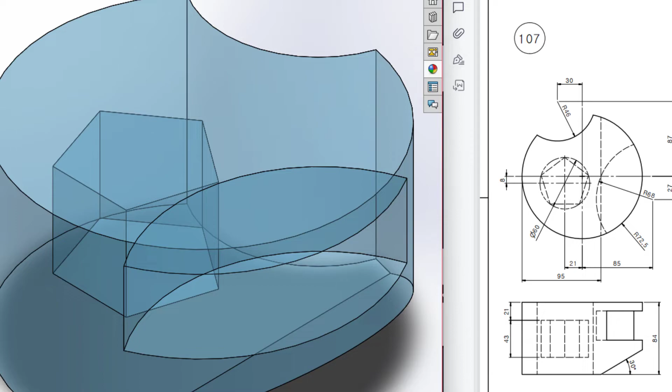Today we are going to solve this 3D problem. In this 3D problem, this is the isometric view, this is the top view, this is the front view, and this is the right side view.

First of all, I will start drawing from the top view. In the top view, I will draw the outer circle, and this circle has a radius of 72.5. After that, I will extrude boss it to 84. But I will extrude boss in direction 1 to 21, and in direction 2 to 84 minus 21, because here we have another inside extrude cut of this pentagon shape.

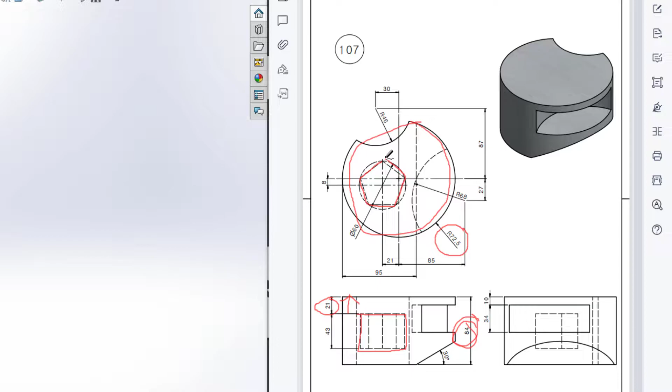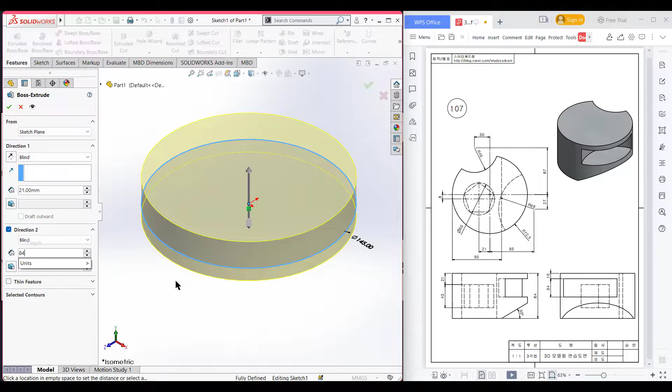Okay, so I am selecting the top plane. Now select sketch, then select circle and draw a circle of 72.5 radius. Now isometric it for a better view. Now go to features and then extrude boss, and extrude boss it to 21 unit in direction 1, and in direction 2, 84 minus 21. Now press OK. As you can see, we have extrude boss in direction 1, 21, and direction 2, 84 minus 21.

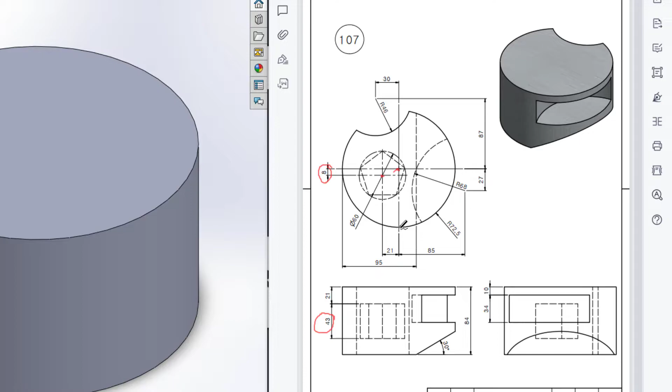So this line is our top face. From the top face I will draw a polygon, and this polygon has 5 sides, so it is a pentagon, and this pentagon has an outer circumscribed circle of 60 diameter. So I am selecting the top plane, then drawing this pentagon, and then extrude cut to 43 unit. But this pentagon has a vertical distance from the origin of 8 unit, and a horizontal distance of 21 unit.

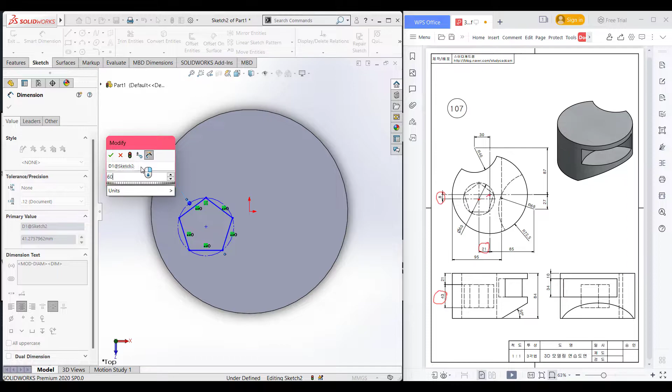So selecting the top plane, now sketch, now normal to it, now select polygon and select 5 sides. Now select circumscribed circle. Now draw your pentagon. After drawing your pentagon, select smart dimension and dimension the circle to 60 diameter. Now press OK. After that, it has a horizontal dimension of 21 unit. Then dimension it, it has a vertical dimension of 8 unit. Now press OK. Now isometric it.

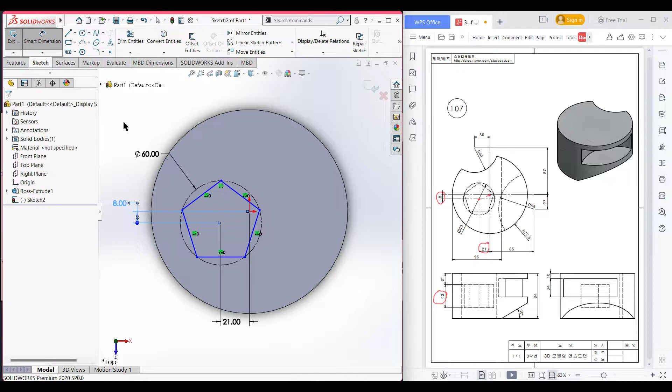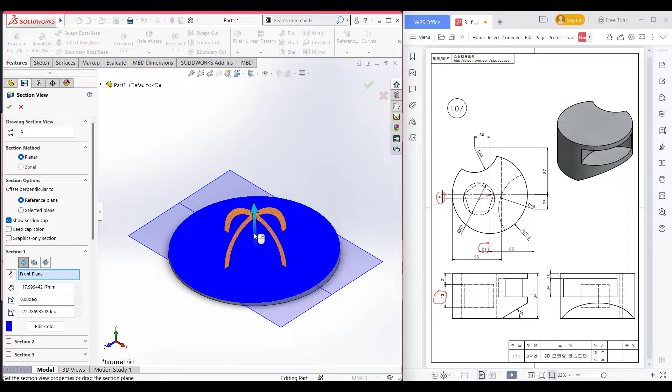Now go to features and then extrude cut. Extrude cut it to 43 unit. Now press OK. For a better view of your extrude cut, go to section view. Now move the arrow so you can view properly. So you can see in the inside of our solid face we have cut and extrude cut.

After that, we can see that we have another extrude cut in the right face. This one, in the 3D model, we can see this one. So first of all, I will draw a circle, and this circle has a radius of 68, and from this origin point it has a vertical distance of 27 and a horizontal distance of 85.

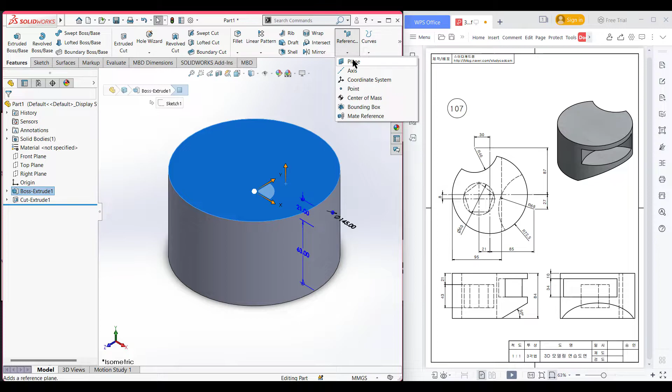But here we can see this extrude cut starts from this line, so I will draw a reference plane from the top face which is 10 unit under this top face. Then from that reference plane I will draw this circle of 68 radius. Selecting the top face, now select plane. Now as we have the dimension of 10 unit, use the flip option. Now press OK. Now select this plane. Now sketch, now normal to it.

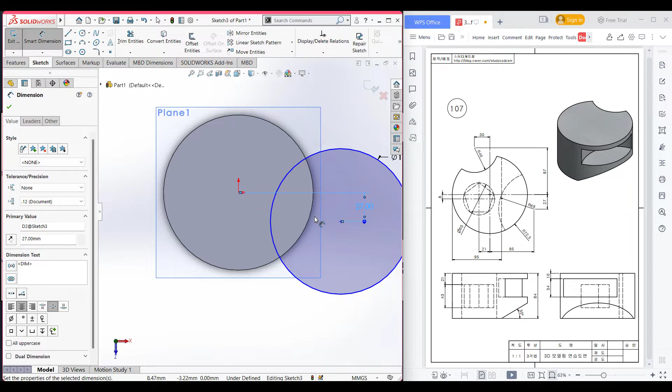Now select circle and draw a circle of 68 radius. Now select smart dimension and dimension it vertically 27 unit. Now again dimension this from the origin horizontally 85 unit. Now isometric it for a better view. Here you can see it has an extrude cut of 34 unit. So I will go to features and then extrude cut it to 34 unit. Now press OK.

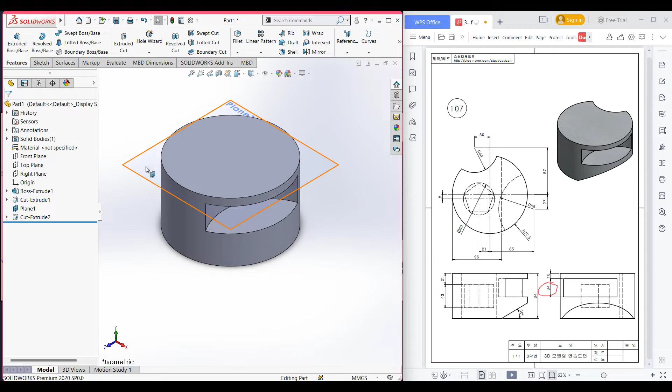Now I will hide this plane because I don't need it. Now here you can see we have another extrude cut through all here, and this circle has a radius of 46, and it has a horizontal distance of 30 unit and a vertical distance of 87.

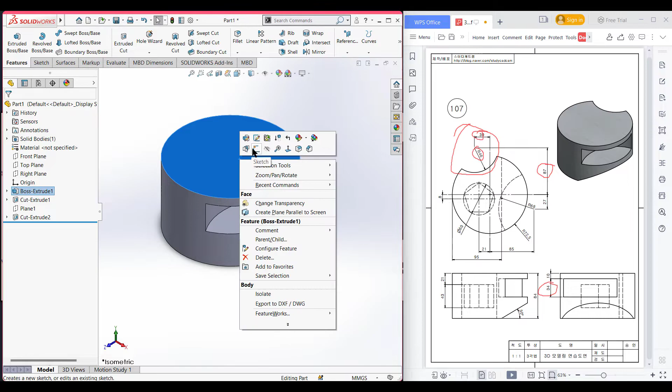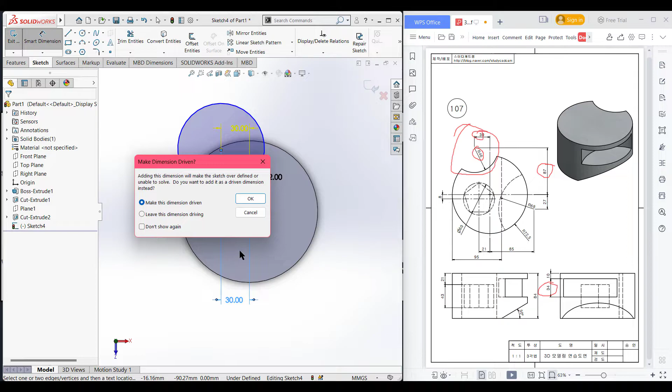So selecting the top face, now sketch, now normal to it, now select a circle and draw a circle of 46 radius. Now smart dimension it horizontally 30 unit. Now select the circle and dimension it vertically. Select this circle and dimension it vertically 87 unit. Now press OK. After that, for a clear view, you can isometric it.

So I am isometric it. Now go to features and extrude cut. Now extrude cut it to through all both. Now press OK.

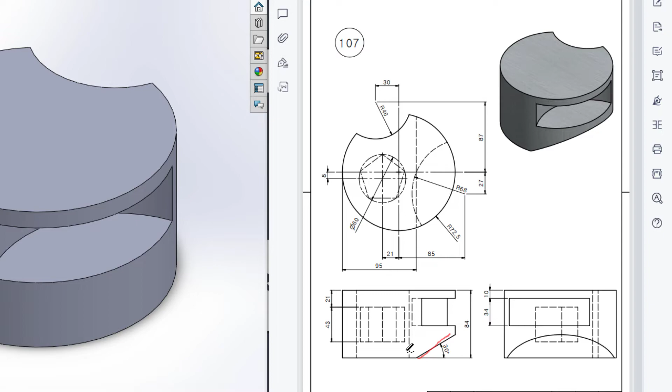After that, we can see in the front face we have an inclined line, and this inclined line has a 30-degree angle, and the distance from this vertical line to this inclined point has a 95 unit distance. So first of all, from this vertical line 95 unit distance I will draw an inclined line, then close the shape and extrude it to through all.

So I am selecting the front plane. Now sketch, now normal to it, now select a line and point the line here and point here. Okay, I have drawn the inclined line. Now smart dimension it from this point to this vertical line, it has a dimension of 95 unit. Now again smart dimension this inclined line to this horizontal line at 30 degrees.

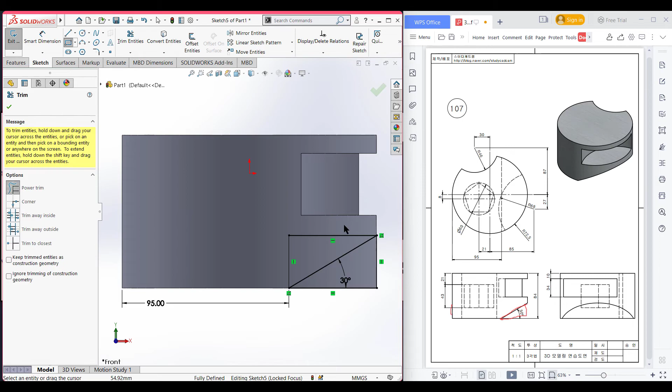Now press OK. Now you can close the shape by using the line tool, or you can use the corner rectangle. I normally use corner rectangle because it is less time consuming, so I am using the corner rectangle. Then go to trim option and trim the lines I don't need. Now press OK. For a better view, isometric it. Now go to features and extrude cut, and extrude cut it to through all both. Now press OK.

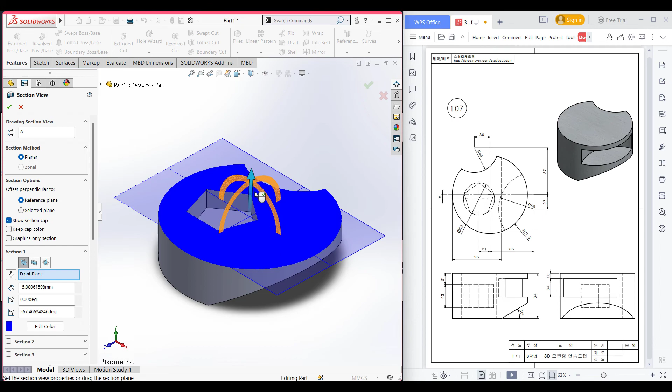If you wish to view a better view, you can see from the section view option. Now you can rotate the arrow. Now you can see the inside cut and the outer cut properly. As you can see, we have drawn our 3D sketch.